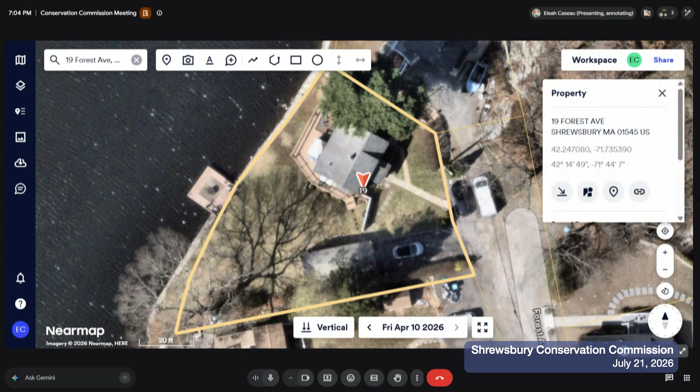And these are on your property? It's Edgemere. I've never had it surveyed. It's close. I would guess that 90% on 19, just as a guess. There was an iron pipe there, but I've never had it surveyed. Are you planning on planting anything else? I was not going to.

Okay, Emily? I do not have any questions, although I'd be amenable to seeing something be planted, whether or not it's a tree. There are a row of bushes on the other side that I maintain on 23 that are right up against the fence. But that's it for me.

Diane? Well, so usually, especially so close to the lake, we'd be asking for you to either keep the stumps up high, like up to 10 feet high, as habitat, or to replant.

And it sounds like you do not want to put in trees. As far as 19, there's probably 9 feet between the house and the property line there. And for 23, I was going to suggest maybe 20 feet. There's just not a lot of room for new trees.

Diane, what do you think about putting some trees there? You own 23 as well, right? Yes, correct, right now. Could he put it at the adjacent property if there's more room there? Sure, you'd have to remove some bushes a little bit and plant some trees there, but you could probably get something in there.

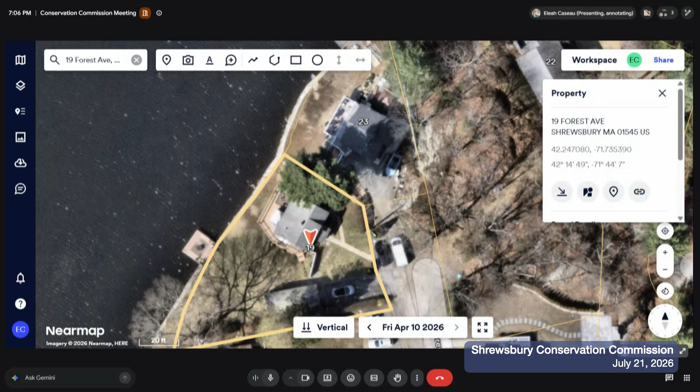So if you're replanting trees, they would be native trees, and we have an entire list of them. There are a lot of trees. You can make sure you're getting one that gets the right kind of sunlight or that doesn't get too tall. Yep, that's what I'd prefer. Can we just do one there, maybe, instead of two?

We would usually go for a 1-for-1. Okay, yeah, all right. Perhaps he could do some type of a tree or a smaller bush or something. So there's a list, right? Yeah, there are a lot of reasons for the trees. One thing is that they help cool the water.

And I understand, yeah, that sounds silly, but they really do, and that's important. But another thing is that they're habitat for a lot of different invertebrates and insects, and ultimately for birds and other things. And when you take them away... Fully understand, I've been on the lake for 40 years. Yeah, okay, so it matters.

There are some shrubs that are extremely hardy. So as long as I have a list to choose from, I'll put them on 23. I don't know what kind of shrubs are there, nothing fancy, but I would have to carve a little space to fit them in. They are available at local nurseries, native shrubs if you want to go that way. Yeah, I'd prefer that to leaving a stump 6 or 8 feet high like they recommended in the past.

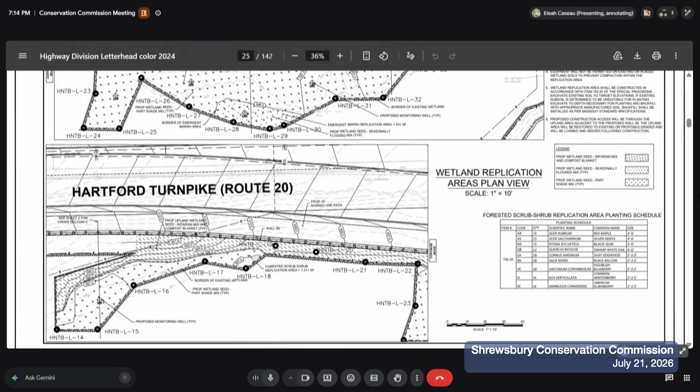However, there's no change to the rest of the project. Everything is consistent with what you guys had previously approved.

Is that it? I guess where on Route 20, like a locus is this? If you go to sheet 16, you can get a better view, a better idea of where the roads are. It's all kind of connected where it was originally, we just had to expand it.

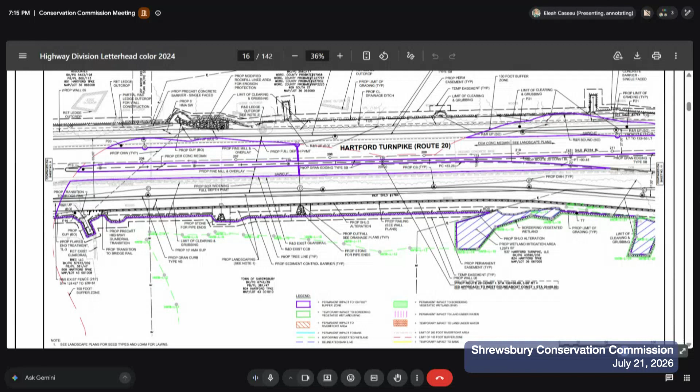So that lobe there is the new adjacent-ish area to 824 Hartford? Yeah, that is 824. Right next to it is 864, which I believe is CJ Trucking or something like that. So there's South Street, then the vacant parcel that's mostly wetland, and then 864, the trucking company, on the south side of Route 20. And that's right next to Dunkin' Donuts. Yes, you know that one?

There you go, the only New England landmark. I know exactly where it is.

This is just additional mitigation, so I don't have any questions. Okay Diane, no, I do not have any questions. Chris, no questions from me.

Eleah asks: will this update any of the approved changes, the order impact numbers, the impact and restoration numbers? Those will be a little different, yes. Okay, we will need an updated set of numbers as well.

I also presume that would be included. It is in that narrative, in the first attachment, with the updated numbers. So then I can include that as well, because we noticed there were a couple discrepancies as we progressed through the project that we wanted to clear up.

We also noted that we had received a request for changes to some of the special conditions issued in the original order. Some were related to interpretation by either the applicant or the commission, and those could sufficiently be interpreted the way the applicant proposed. A couple referenced the Shrewsbury Wetlands bylaw, and that language can be removed since it's not applicable to this project.

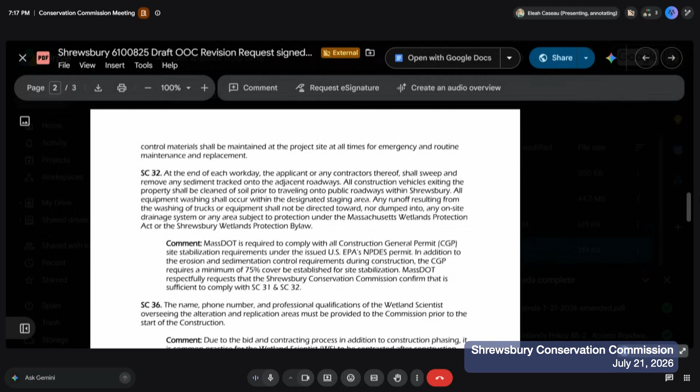The language in special condition 36 is related to receiving the name and contact information for the wetland scientist in charge of the replication areas. This might be something the commission wants to consider - MassDOT noted they don't typically hire the wetland scientist prior to the start of construction, which relates to our condition. I don't know if the commission would be amenable to having them provide it prior to replication beginning, if that would be sufficient.

Or once they start the project, they'd give you all the names of the appropriate people. So providing the general contact information of the contractors as they're established - whoever's in charge of the site, and the wetland scientists - as they come on board, might be sufficient.

I think there were some special conditions related to having more regular check-ins as well, so that will be something involved as we meet to discuss how the project is moving forward. We understand the limitation of MassDOT not paying for the third-party consultant. We'll leave special condition 38.

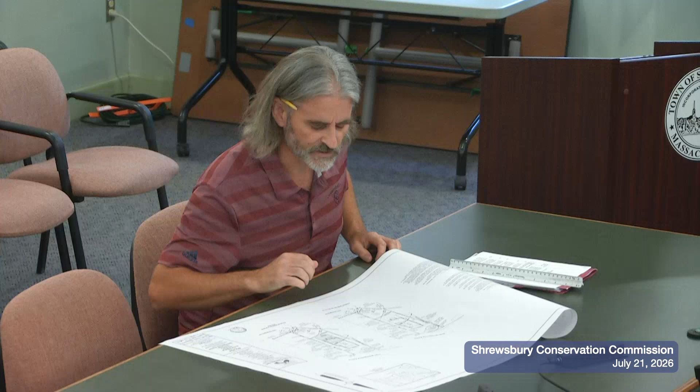The existing lot is majority lawn, and there is a rubble/boulder retaining wall along the lake. The shoreline is not in a natural state. We did a soil test in the yard, and it's fill material, so there's not natural soil in the yard. We held the retaining wall as the wetland line, as the lake line. The neighbor also has a retaining wall, 100 feet from that is the buffer zone.

It's a very simple project. The client has a 500 or so square foot deck on the back of the house. He wants to take that down and replace it with a 600 square foot addition, and then build a new 600 square foot deck off the back of the addition.

We kept the limit of work line more than 50 feet from the wetland and out of the NHESP priority habitat.

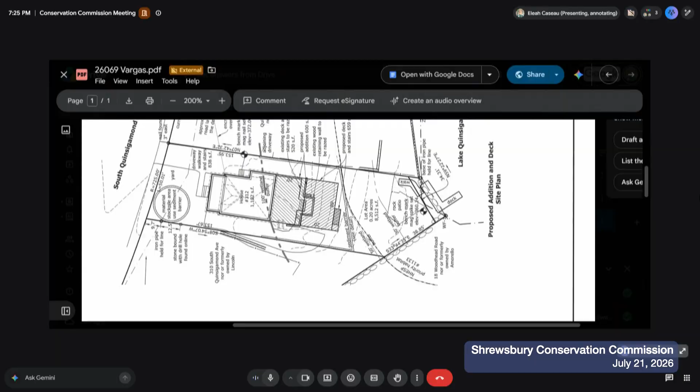So how will this be constructed? This is going to be constructed on posts, because there's considerable ledge under it. I haven't seen the final architectural drawing, so I can't tell you exactly what the foundation looks like, but it is sitting on ledge, and the architect told me he was coming up with a post design. So the building addition itself is going to be on posts? According to the architect, but like I said, I haven't seen the final plan set from him.

Wouldn't we need that beforehand? There's significant ledge under the deck at grade, but we would need to know how that is going to be supported and what type of excavation would be done. If you were to excavate that all out, that adds significant disturbance so close to the wetlands. So we would need to know, versus posts where you'd just drill a post in to support the building. These posts would probably be attached to the ledge. There's surface ledge right under the deck, so I don't think helical piers are possible. They'd have to do some sort of engineering drilling, so I don't think the foundation has been fully designed yet. We would need to see that. We would like to see that.

Understandable. Emily, do you have questions? I do not. Diane? No, not right now. No questions. Chris? No additional questions. Eleah?

So are you anticipating that you won't need a letter from the NHESP? We're not planning to do any work within the zone. Okay.

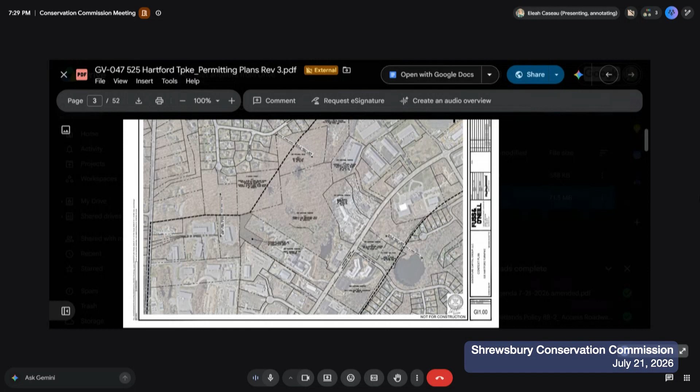Emily? I do not have questions related to the letter that was submitted, this response letter. But I do have a question regarding your need to request waivers under the Shrewsbury bylaw, the wetlands bylaw, if any at all, if you folks have waiver requests.

Embedded in the NOI to date, I'd have to go back and look, I guess remind me, is it the waiver to work within the no disturbance zone for the crossing specifically? For the crossing, and I'm not sure if other areas overlap those zones. I was looking at the plans earlier. I believe we respect all the setbacks for all the buildings and all the limit of work in each area except for the crossing.

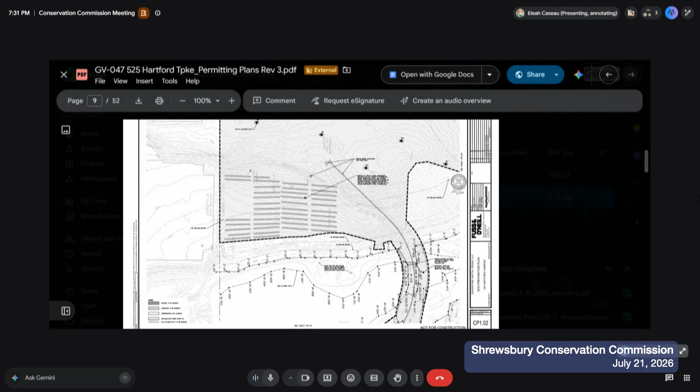And I could pull up the NOI, or if you have access to the PDF, maybe just search the word waiver and see if it was included. But I just want to understand if we have to issue any waivers for this project. Certainly for the crossing. And I don't know if that needs to be a waiver request submitted in writing, or if that's something that could just be voted on verbally.

If there are more than one waiver or areas subject to a waiver request, we should see an outline as to what needs to be waived. And I guess also for impacts to the IVW, might be another one.

Can certainly put that list together unless we can quickly come up with something regarding that. My apologies. No, it's okay.

I think there would be a waiver request needed regarding construction of the crossing, because that's a structure within the 30-foot and the 15-foot. And the replication area would be disturbance within that 15-foot, so that would require a waiver related to work within the 15-foot no-disturb zone.

It looks like there's a requirement for replication of a 2-to-1 ratio, and it sounds like that's not feasible. I don't know—we've gone through several iterations of the replication area, so I'm not sure if it's expanded to meet that 2-to-1 at this point.

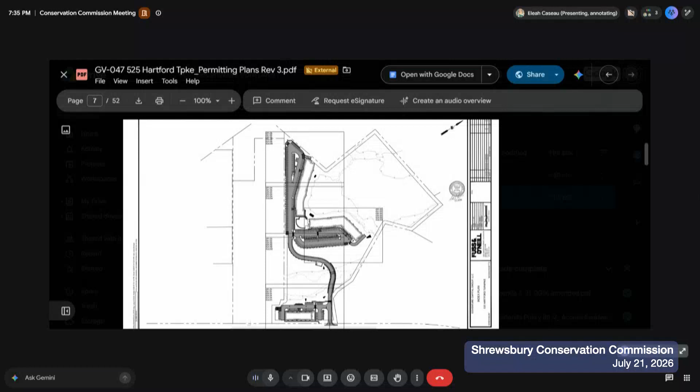There's a channel and the BVW at the base of the hill that does have pretty substantial slopes associated with the drive to the residential. Right, that might be something to consider—that would be where the most substantial slopes are, if that's what you're speaking to.

I'm sorry, which part of the property are we talking about now? I'm probably looking at this sheet, CE 1.03. That's what I'm looking at too. Okay, so on the northerly side, at the top of the page—

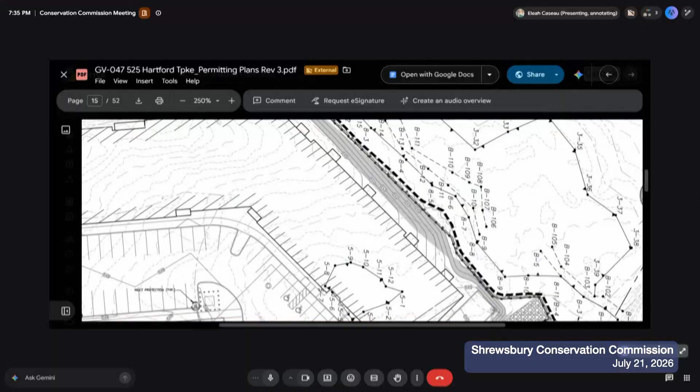The grades behind the building are pretty steep. I'd say they fall off the map there—you can't see the elevations, whereas you can see them on the south side of the plan, from 545 to 540. Here we go, 549—where are you getting 549?

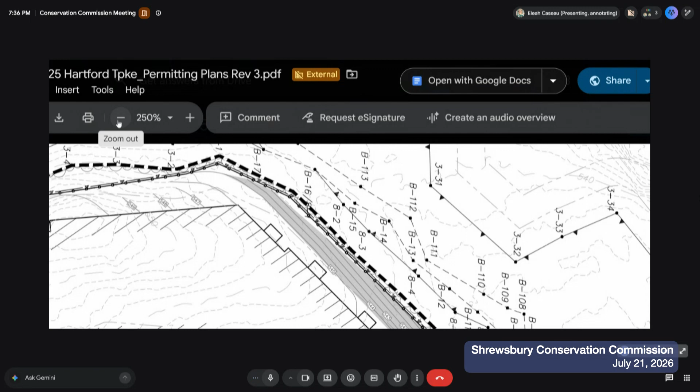So the outlet of wetland 3—I'd say the outlet stream and BVW. Let me zoom out a little so we can see more than just a slope. This is the stream that exits wetland 3. Here, the slopes really aren't steep.

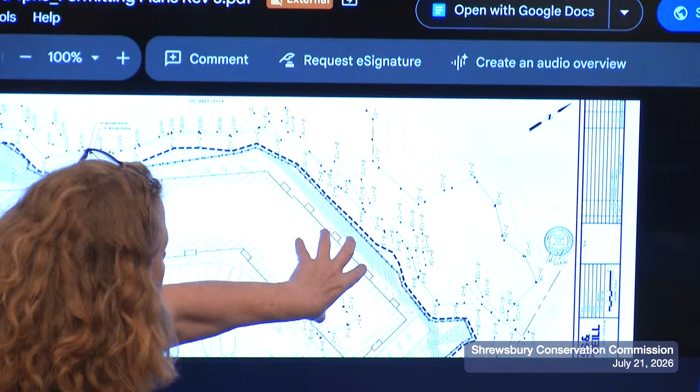It's probably a fill area of the project—they're adding fill, raising the elevation here. I'm not talking about the building, I'm talking about directly behind the building, near the vernal pool. Maybe that's a different area—well wait, looks like it's going to be 540.

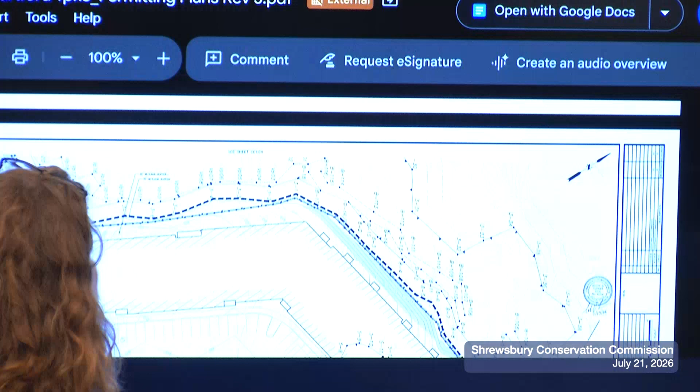Is that the one? So all of this here is pretty steep—is that a correct assessment? Correct, but they're at the top of the slope and they're not going to be doing very gradual grading here. So what is this area going to be, finished?

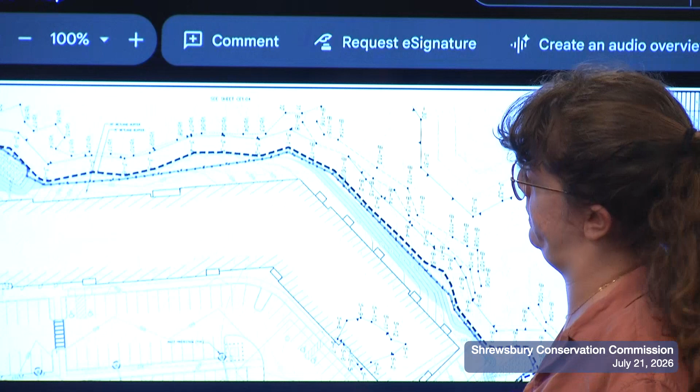Natural vegetation—lawn, probably landscaped lawn I'm assuming. Oh I see what you're saying, sorry—you said natural vegetation. Is that grass? Yeah, it'll be seeded, yep.

I recall something about wanting this area to be accessible to the residents, or am I making that up? No, I think there was something said that people would be able to connect to the conservation land and sit back there. Yeah, ideally I think that area is flat enough for tenants to be able to go back there.

So do you even anticipate—I know the eastern section of the property is proposed to be put as conservation restriction land. Is there a proposed access point to that? There's not, no. Okay. Because with it bordering so much of the wetland, having folks muck through the wetland might not be the most fun for them, and also maybe not the most fun for the wetland to remain resilient.

If everyone's happily taking advantage of their conservation land space, identifying if there's an access point available to residents that would not be mucky—or if there is, there needs to be a consideration that there might need to be a future filing, like 'we'd like to install a crossing,' a little baby crossing, not a big crossing.

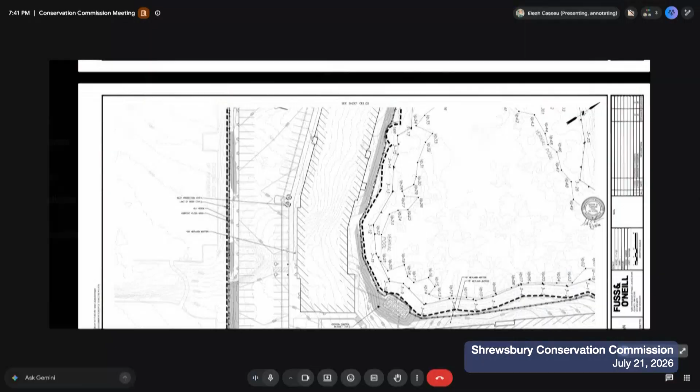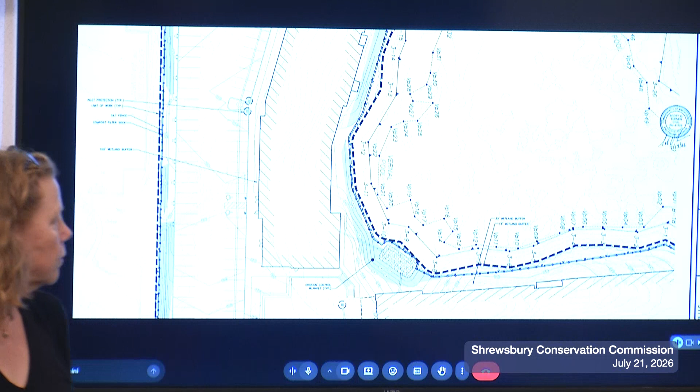Anything else, Emily? I guess—so the land adjacent to the vernal pool, what's the cover type? The 15 feet no-disturb, is it treed, is it vegetated, what does it look like currently? We respect the 30-foot, interior to the erosion control line, and then the 15-foot is along the erosion control barrier. It'll be 15 foot in its current wooded, forested condition—ground cover of leaves and intermittent boulders and leaf cover.

I guess that's it for me for now. Okay, thanks, Emily. Diane?

I'm not sure this is a question, it's more of an observation. I am concerned that the pond downhill is going to receive a lot of water that may not have been adequately treated, in part because of the ledge up there, if I'm understanding correctly—that does not sound good. Well, if my recollection of the stormwater design is correct, because they're adding fill, the subsurface infiltration systems are going to be in that fill. That's not the case—I don't know if they can site infiltration in fill. Then my recollection of the stormwater is not correct.

So with the stormwater, is the source of the new water just runoff from the site? Runoff, or impervious surface, the roof being drained, impervious surface, snow melting—anything that's basically paved or a building that it rains on and water sloshes off.

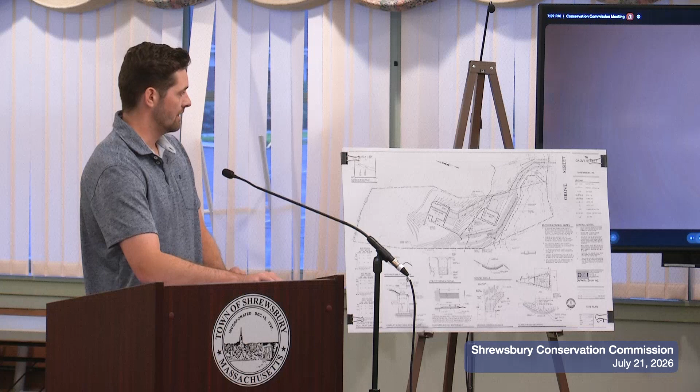During the site visit, there was only one flag requested to be added to the wetland delineation, between two existing flags, which pushed the wetland boundary buffer zone up about 3 feet in one area, close to the property line between 74 and 76 Grove Street. So there really wasn't much change to the buffer zone impacts there.

Additionally, there were other comments from EcoTec. I'll go through them. They requested that additional wetland flag be added, which has been done. The 15-foot no-disturb setback buffer zone line and 100-foot buffer zone line were labeled now, as was requested. We also added the 30-foot no-structure setback and labeled that accordingly.

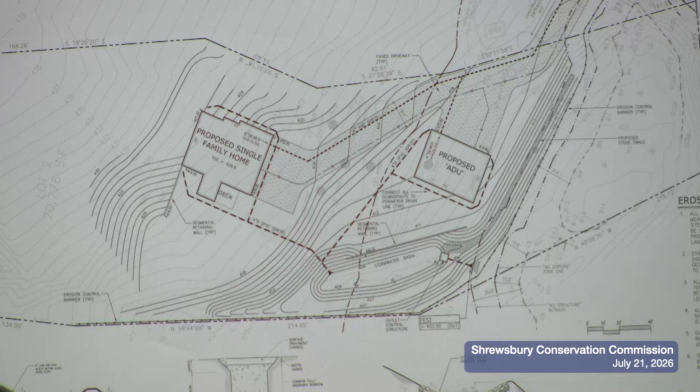For the erosion control barriers, there was a request to add a specification that they were staked, weed-free straw bales. So our detail on the site plan made that adjustment in the erosion control barrier detail.

There was some request for clarity with the subsurface utilities being installed nearby the existing culvert on 74 Grove Street. So we added the sewer profile in the top left-hand corner of the site plans, showing the existing culvert and its depth, and the proposed water and sewer lines being installed further below the existing culvert. For installation, we'll need a trench on both sides of the existing culvert, then poke through underneath it to allow for the installation of the water and sewer lines. So that should have addressed that clarification.

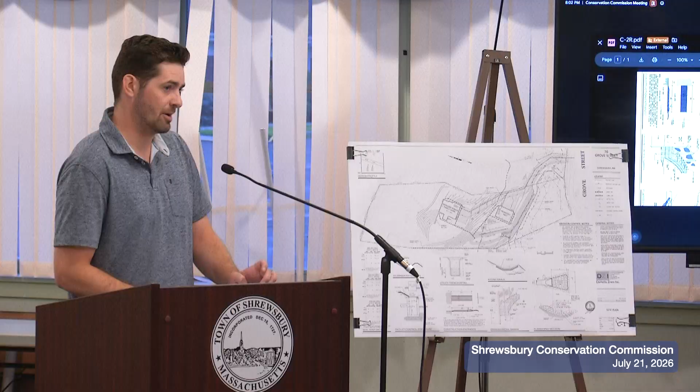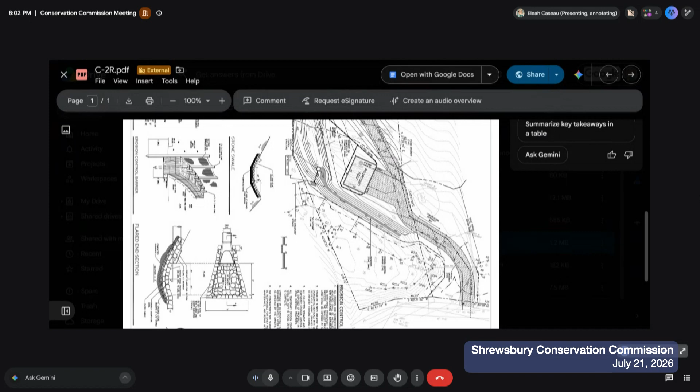On stormwater, there was a question whether the stormwater calcs included the stormwater falling on the portion of 74 Grove Street, and if the stormwater from that driveway portion would be captured in our stormwater management system. The engineer has confirmed yes, that the stormwater management system is designed to capture the runoff from there as surface flow, entering a stone swale shown here.

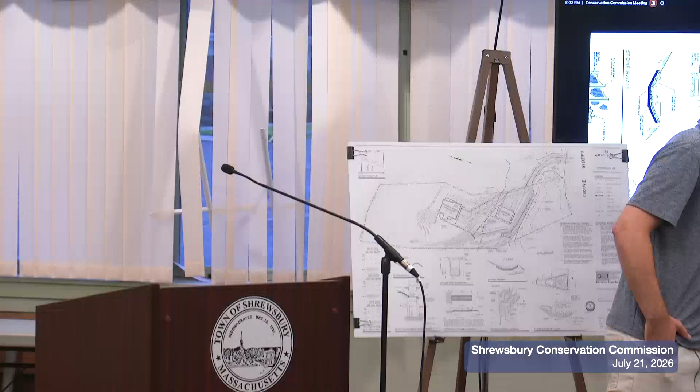That will take that flow and have it enter our stormwater basin. The swale is a riprap swale right here. As stormwater rains down onto the driveway, the driveway is pitched so that stormwater will flow down to this swale and then make its way to the stormwater basin.

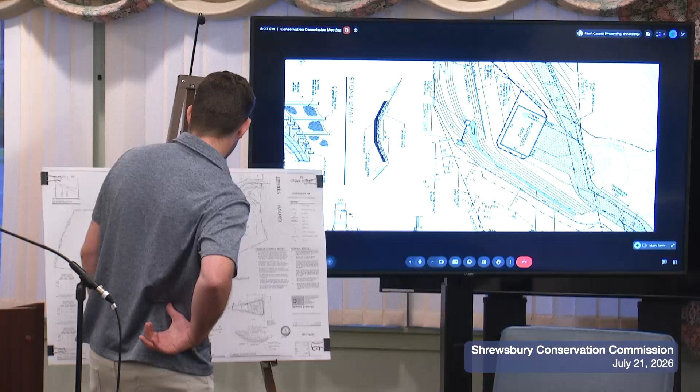How big is that swale? It looks quite long. Do you actually need riprap to go that far? Here's the detail for that - here's our stone swale detail. It looks like 30 inches, so just over 2 feet wide, with slopes going up.

I presume it's needed because we did receive a stormwater management permit from the DPW, so they did the thorough review and ensured that was sufficient for the stormwater management.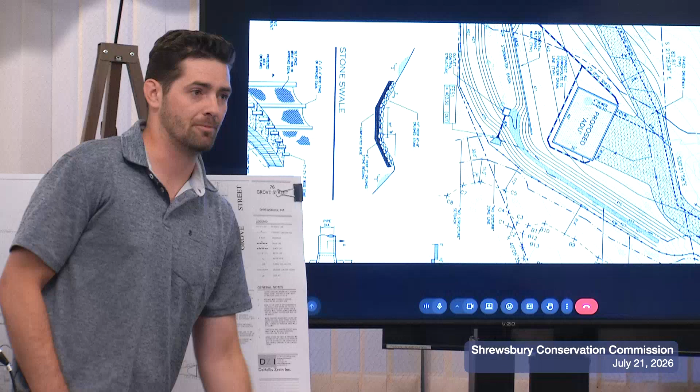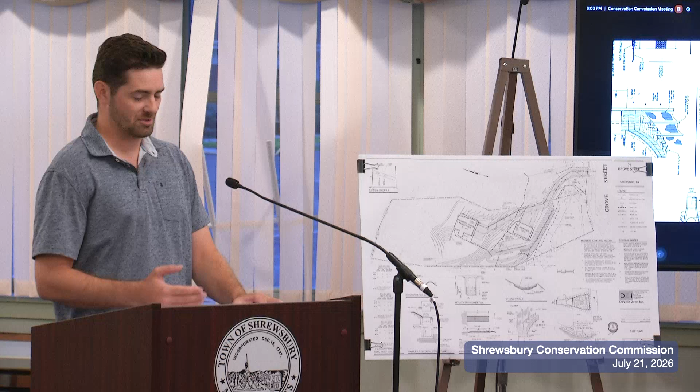There was a note about the 2-to-1 and 2.5-to-1 fill slopes, requesting stabilization measures be documented on the site plans. Those are mentioned in the erosion control notes - there was already a note saying slopes at a 3-to-1 slope needed to be stabilized in certain manners, and any slopes greater than 3-to-1. That note covered it, as well as the stormwater management document, the drainage report, which also had an operation and maintenance plan to address stabilization measures. So that one is addressed.

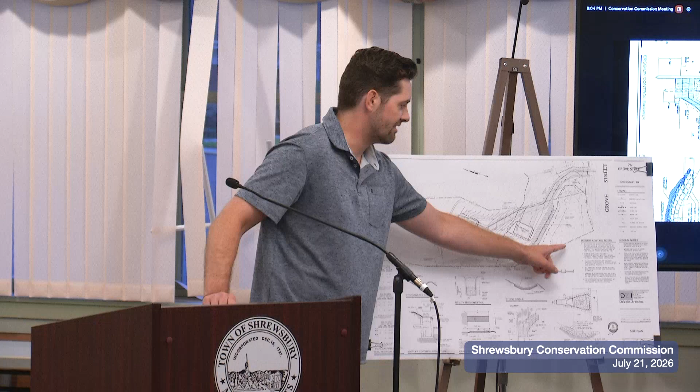The final comment from Ecotech was that there's a stream that drains off of 76 Grove Street down here, with stream flow coming down and eventually leaving the site over here and over here. Ecotech requested the obstructions be taken away from the culvert, and provided a photograph of a couple of wooden boards and some wire mesh that were clogging up flow from going through the culvert. We're more than happy to have that as a condition to make sure that's removed.

Is that at the main driveway crossing culvert or the downstream culvert? The downstream culvert, yeah. Okay.

There's no crossings associated with this, right? It's just a new ADU in the buffer zone? So on that screen you can't see, but there's a proposed single-family home outside of the 100-foot buffer as well. So there is a wetland crossing.

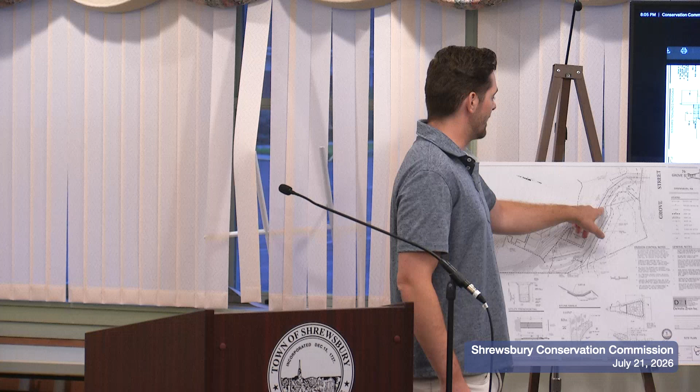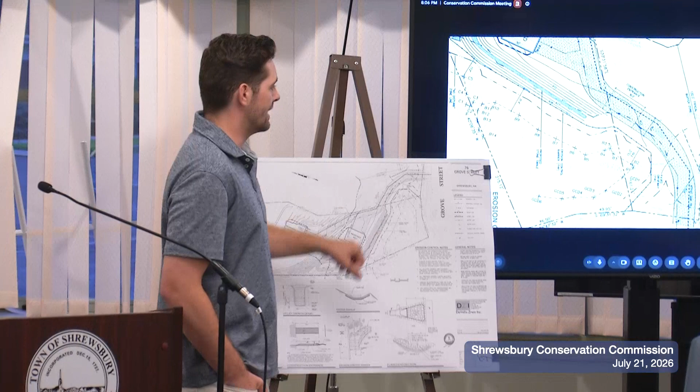Yes, on 74 Grove Street, there's an easement that allows the owner of 76 to construct their driveway and install their utilities within that easement. And there is a crossing that exists today for the existing owners of 74. So they drive up and go to their house. This drain pipe is what Ecotech and I believe you all had some questions about the utilities and how that would all be addressed.

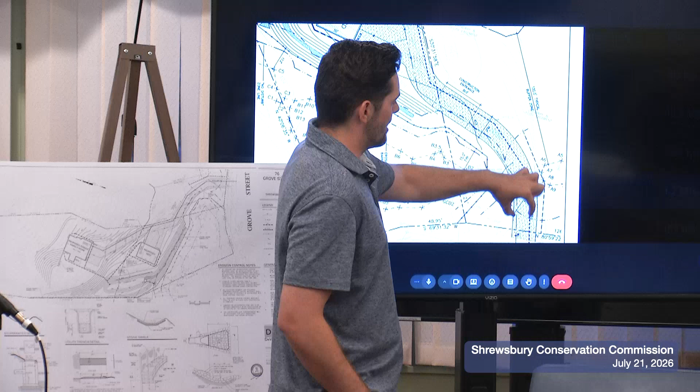So we added the sewer profile detail just to show that we are putting our utilities below that existing drain pipe, and the only work in that existing crossing area are those two utilities and the paving of the road. And then we had Mass DEP, they issued a file number.

So on the agenda I see question marks, so I'll just say it for the record: it's 285-2047. Their comments, one of them was about the depth of the intermittent stream culvert, so again the sewer profile was added to address that DEP comment. And then two comments about stormwater management.

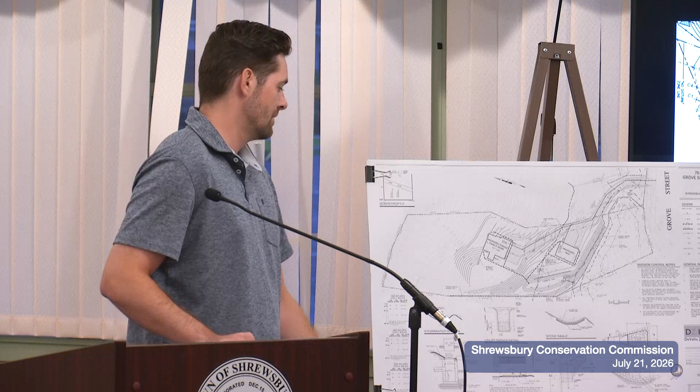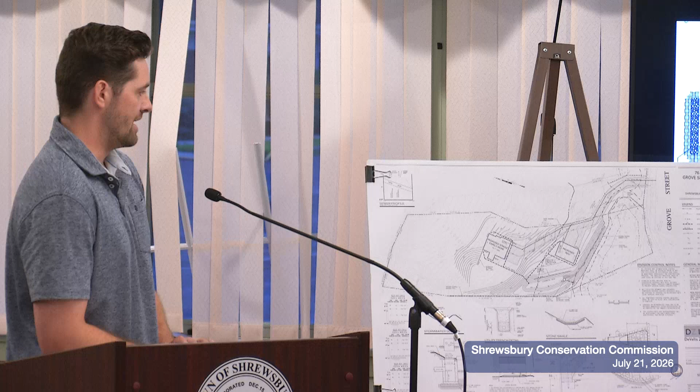One of them was specific to test pits being shown, so we did add the locations of test pits for the stormwater basin, which all are within the footprint of the bottom of the basin. The test pit data was provided on the plan as well, showing depths of certain soil textures and where they found groundwater. These test pits did not have any water at the bottom, 66 inches down.

We believe those addressed all of the comments from the peer reviewer as well as DEP, and also since we received the stormwater management permit, we believe we should be all set to obtain an order of conditions if the commission would be amenable to that.

Okay. Emily, do you have any questions? No questions. Diane, do you have any questions? No questions. Chris? Nope. Alea?

I did have questions related to the extent proposed for the downstream culvert. It sounds like Art had kind of spoken to removing some of the material. At this point, that culvert is non-functional, there's major subsidence going across the top of it. Is there any opportunity to yoink it completely? Because it's not doing anything. Based on the pictures, we'd be happy to remove what's there.

So are you saying instead of just removing what's right in front of it, like whatever's surrounding it? Yeah, because there's a concrete pipe that was there that is not serving its function. It seems mostly the water is going around that pipe, any water coming from above is going around the pipe. Any water coming through from the wetland to the downstream channel and off the property is going around the pipe, so it's not doing its culvert job anymore.

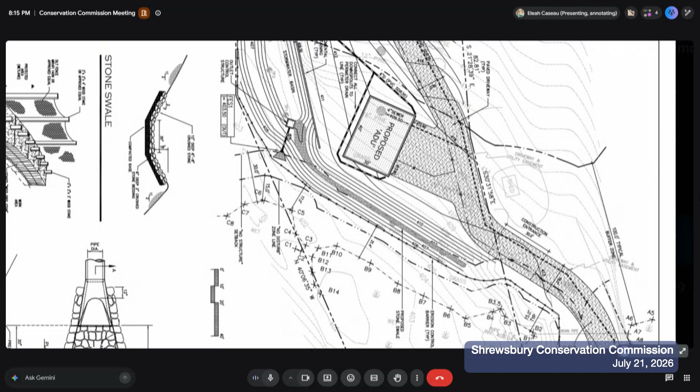So I think we have existing grass beyond our erosion control barrier, so it'd be sort of odd to have the break if we had it on one of the slopes and then more lawn. Yeah, if there was desire for the commission to have some thought on that, I'd almost want to say, instead of doing it in our existing limit of work, just seed in the area within 5 feet to the wetland boundary. If you scroll up a little bit.

Sorry, scroll up or down? Oh, there we go, down.

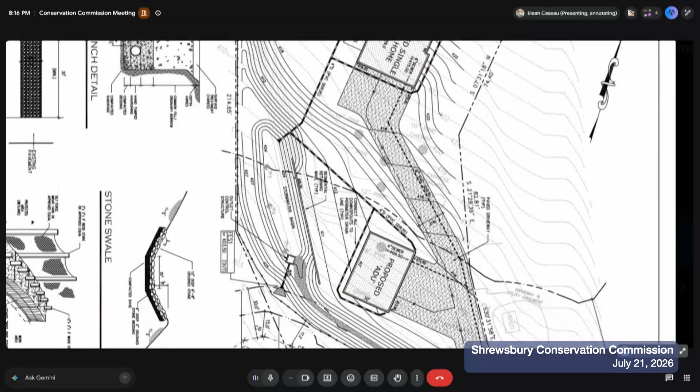There you go. See how we have grass here, existing lawn from 74 Grove Street. This land was subdivided, so there was already grass here.

Instead of having there be like a sliver of that seed mix, I'd almost prefer that we just do a little 5-foot strip around the BVW to add that meadow there instead. Or just wherever the existing limit of lawn is, give it 5 more feet instead of having this sort of break there. Is there an opportunity to do both?

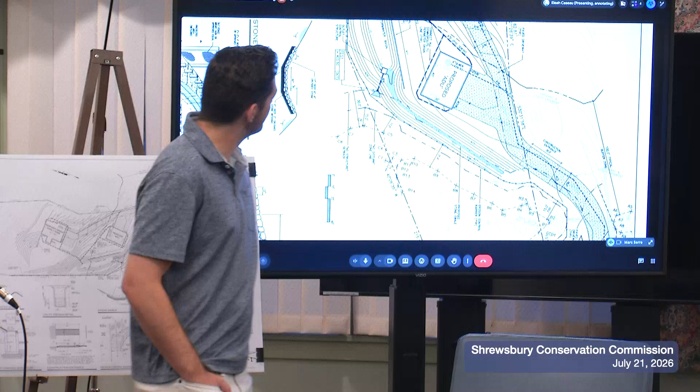Return the grassed area that is beyond the limit back to meadow and then add some additional, so you wouldn't have any break. Then you just have meadow. Yeah, here would just become meadow.

From the base of the swale to where it goes beyond the erosion control, there is grass and probably shouldn't be grass.

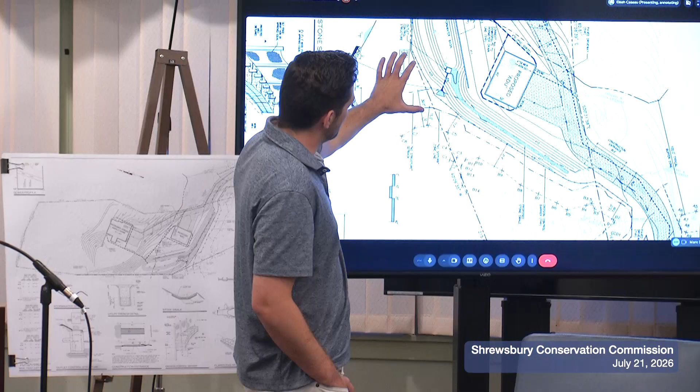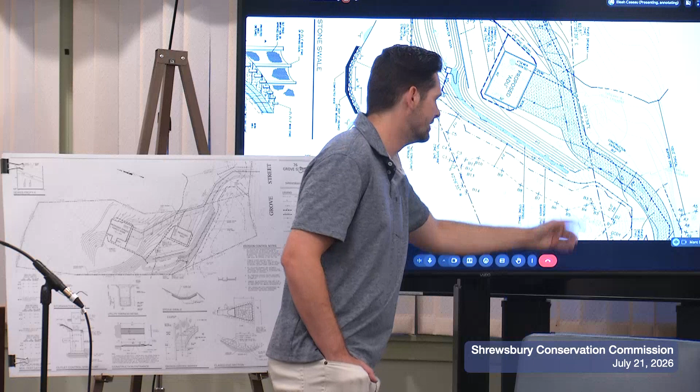I think that would be okay. I think the applicant would think that would be okay, considering we're doing the house, we're doing the ADU. There is a separation between that area, so I don't foresee an issue if we chose maybe from here, from the stone swale down to the BVW, just to have a native wildlife mix installed in there.

If it's possible not to have too many restrictive conditions on that, like monitoring reports and stuff, if we could do without that and have it more on the day of the certificate of compliance, just ensuring that the area has been maintained as a meadow mix. I think that might be fair. You guys are all right with that?

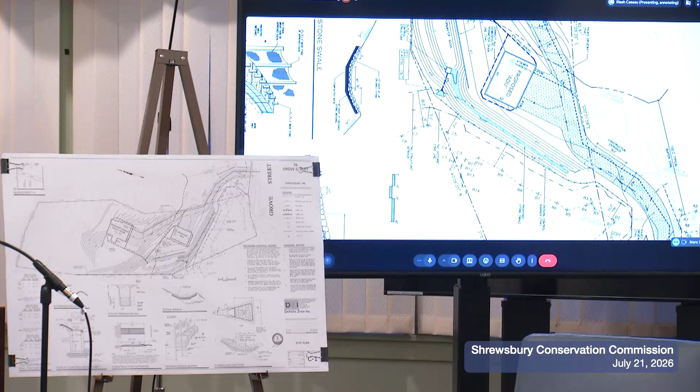Yeah, and then the time of year when that would get mowed would matter. So then that would probably be associated with the O&M plan, as part of maintaining, because the basin will need to be mowed as well.

Is the intention for the base of the basin to be a grass mix, or is that going to be? Okay, so maybe we don't do any proposal within the basin sloped areas, just so we don't mess with the operation.

I understand that, but there's a mowing plan associated with the basin. So there could be an additional thing in the O&M plan related to a separate operation and maintenance for the meadowed area. So why don't you just plant the basin with the meadow mix?

I think the concern with that is changing how the basin is operating, is that what you mean? Yeah, I'd want to not mess with the approved stormwater management plan and keep that as a mowed system, and then just focus more on the land between the stormwater management features and the BVW boundary.

Maybe if you wanted it in the O&M plan, we could just add one condition saying mowing is allowed of the meadow area between the basin and BVW. Well, it would be a limited amount of mowing, because if you mow a meadow down, it does look like lawn, because it's all grass.

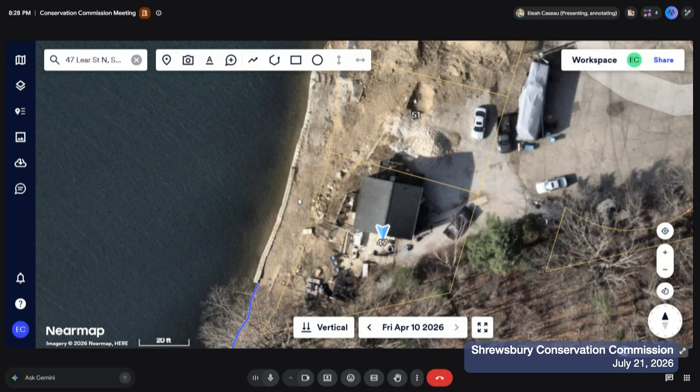You can see that a block retaining wall has been constructed along the water's edge. No work on the retaining wall at the water's edge was proposed as part of this project, and you can see that it does. How far from the water's edge? It's on the water's edge.

Let me do a split view so you can see. So this is April of 2026. Let me do April of 2025 - there's no retaining wall, and then there's a block retaining wall.

Oh, I see it now. Sorry, I didn't see it before. No, yeah, it's all good. Can you do that again, please? Yeah, absolutely. Okay, and then go back.

This is Nearmap for you, Chris. I know, look at these fun-filled aerials. Back and forth and back and forth, yes.

You can also see there's pretty readily some unsecured slopes available on site. They've installed slopes pretty readily up from the water's edge to the top of the road.

It's probably, oh God, Kenny, what does that feel like to you? 20 feet of a height change? 30? Oh yes, so from the road area up here at the main road to the water's edge is about a 20 to 30 foot change. I'm not good with numbers. It's a big tall hill.

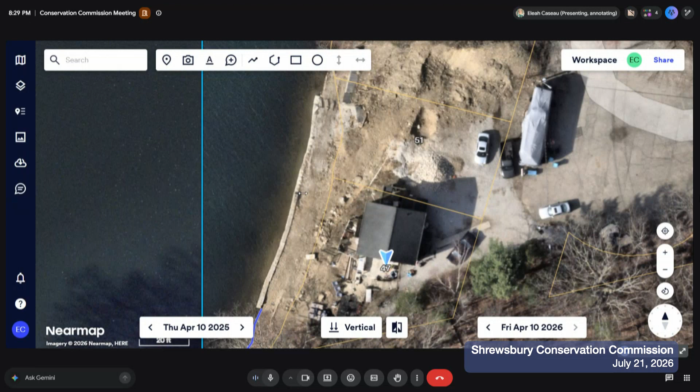In order to access the site, they've installed some pathways to get trucks down there. So it's just a lot of unsecured dirt on site. They were able to install silt fence at the edge, but there are still some concerns related to the number of unsecured slopes, and that's related to the enforcement order as well, along with the addition of a retaining wall that was not part of any of the approved plans we discussed, and the substantial piles of dirt.

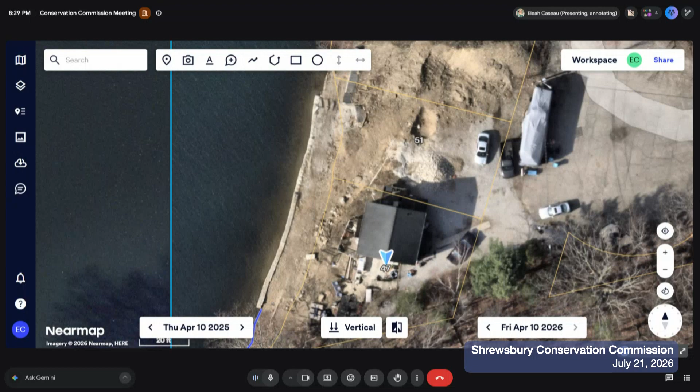And any of the work that was done down below, remember, they weren't going to do any of that. They were just going to have a little garden in an area that was already disturbed, up here. I'm just trying to find a picture to show everybody, I just can't find it.

Here it is, I remember the project. So there's the wall that's in the water, four courses. I think that was there, but there were other walls associated, and I think they put them in. That wall, okay, that wall, that's right - this one I believe is existing. This was new construction, see it? Yeah, and see how they leveled everything off. They went all the way across the front. Did you see this?

So where are we with the enforcement order? We issued it, and you're working with them. If the commission would like to vote to ratify it, then it will go out fully ratified. What does it say? Is it requiring them to restore it, or? Is that it right here? I'll give you the sheet, you can read or sign while I go through it.

So the type of activity that was noted on site was the construction of the retaining wall at the wetland edge, which has resulted in alteration and fill within a resource area. What's the order - what are we telling them to do? Oh, I apologize, yes. A cease and desist - the resource area shall be, so this was kind of for everything: a restoration plan to be filed, a cease and desist, and then they shall correct.

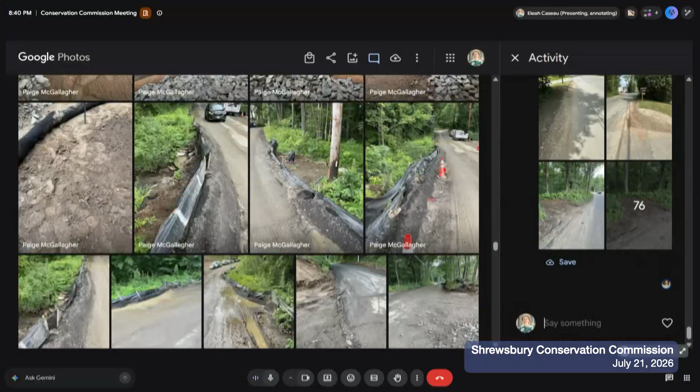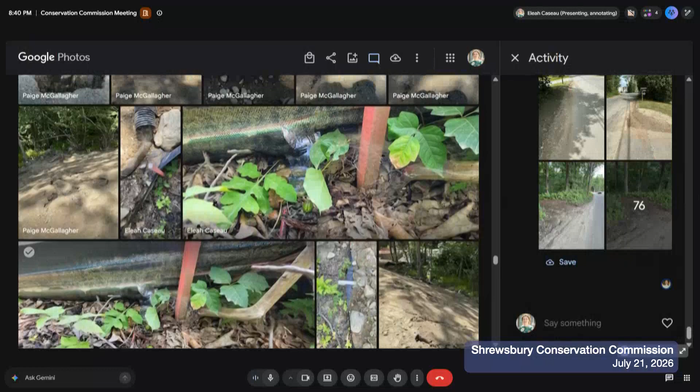But I do understand there's a lot of site that's exposed. The entire site is open, so I would suggest, and I'm only one person on this commission, that all work be stopped and all efforts be concentrated on mitigation. Here we are in July, and there is not one stitch of vegetation growing on that entire site. All the slopes are open.

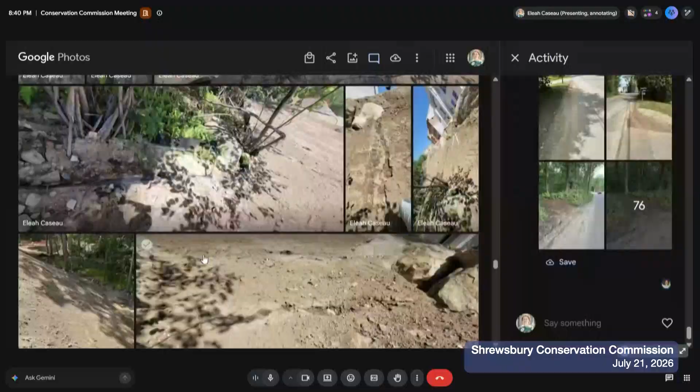I don't think this conforms to your sequencing plan. There's nothing here that conforms to what you guys said you were going to do during construction. So, as just one person on this commission, and we'll discuss it, I would like to see a cease and desist of all construction activities, and all efforts be concentrated on stabilizing the site -- slopes, tackifiers, jute netting, the whole 9 yards, because all 3 areas are open.

Yeah, we did discuss that during the site walk. So they were getting stabilized, the slopes above the wetland. But they're not. One of the things, even today, this rain, it all washed away. It all went across the road, down into the swamp. It happened again. It's been happening all summer.

It's certainly a concern, and I can raise it with Pulte and see if we can have the contractor address it. You're gonna have to, because we're gonna, I think we're gonna issue a cease and desist to stop all construction activities and relate it all to stabilizing the entire site.

This is Essex Petrie from Pulte here, and I appreciate what you're saying, and I do want to note that we do have areas that have jute and have been treated, but fully recognize that there are areas that did wash out previously. I haven't been out there since this last rain we got tonight, but we recognize that was a concern previously, and we do have netting out there.

There was not hydro-seeding. Essex, there was nothing there this morning. We have been treating it. There was nothing there this morning -- nothing, zero, the whole site. Well, there was netting when I was there. I appreciate that you were out there this morning, but I do know for a fact that we have sections that have jute netting and that have been hydro-seeded. One slope.